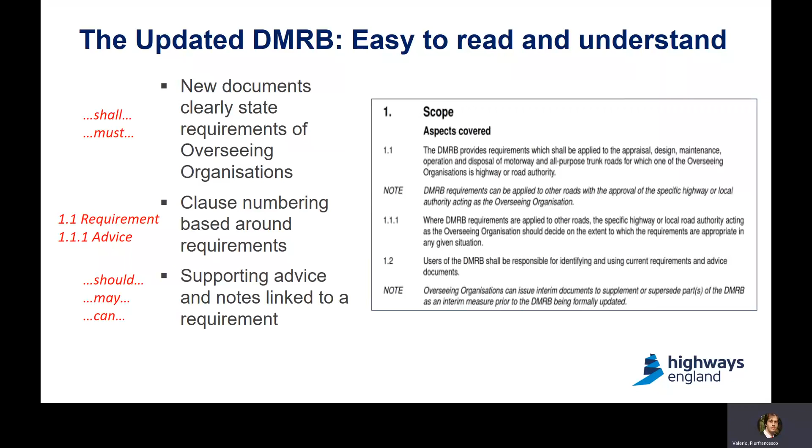Today we discuss the update to the standards for management of bridges with half joint and deck hinges. In the 60s and 70s, there were a lot of bridges constructed in the UK, and to standardize and simplify design and construction, many of those bridges were designed to include half joints or deck hinges. These are critical components with low robustness, as they are vulnerable to deterioration and they are difficult to inspect. They have been managed using BA39/93 and IAN53/04 for half joints and the BA93/09 for deck hinges.

Those documents have now been updated, leading to the CS466 and CS467. IAN53 contained the provision for management of half joints, while BA39 and parts of BD44 contain some provision for assessment. These have been merged, expanded, and have resulted in the CS466. BA93 contained provision for both management and assessment, and they have been updated, resulting in the CS467.

There are approximately 400 bridges with half joints and 100 bridges with deck hinges on the strategic road network managed by Highways England.

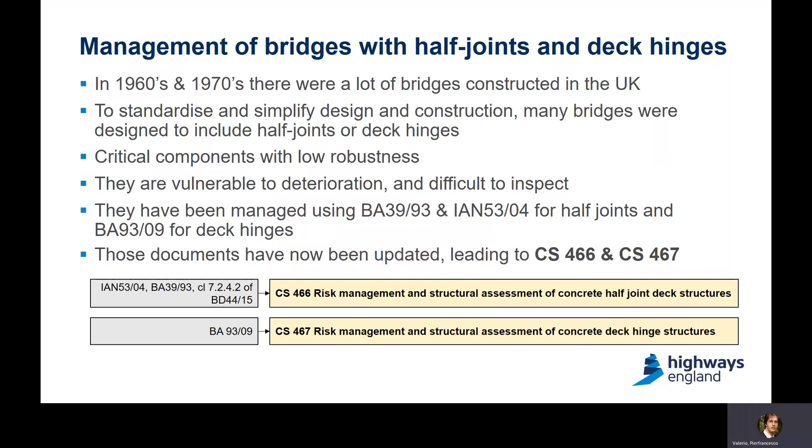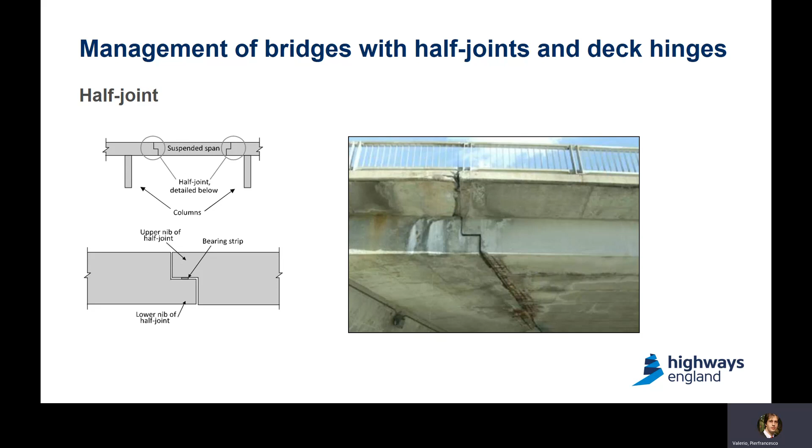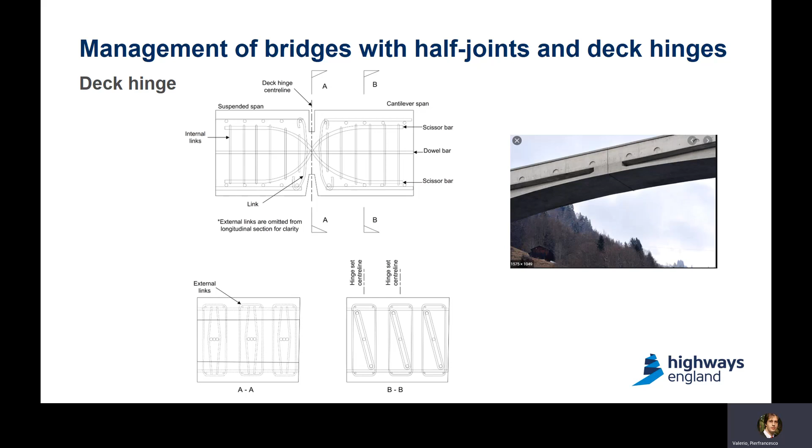In terms of risks and issues with this typology of bridges, access is difficult as they are often over live carriageways. Inspection and maintenance is difficult for this detailing because it often requires intrusive investigation. Defects are not often visible from the outside, making them vulnerable to waterproofing breakdown and water and de-icing salt ingress. Usually there's no alternative load path available, so they are susceptible to sudden collapse. The lack of robustness therefore requires careful management.

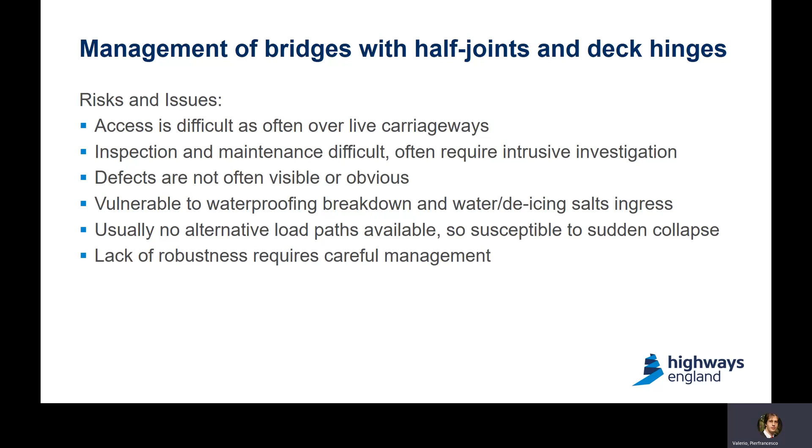Key changes in CS466 and CS467 compared with the previous documents include changes to the management process, and increased flexibility given to the choices that can be made by users of the documents in some aspects, including highlighting the importance of structure condition, and changes to the risk assessment process, the management plan, technical requirements, and guidance for structural assessment.

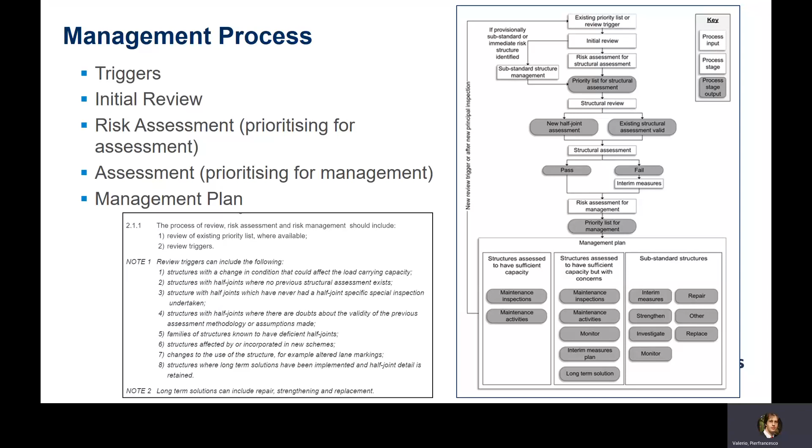For both documents, the management process is now clearly defined in a flow chart, as shown on the right-hand side of the slide. Triggers for initial review are defined, followed by a double layer of risk assessment that leads to either a new structural assessment for the bridge or directly to a management plan.

The new documents include a strategy for structures without signs of defects. The main documents give what is required to be done, but the how is achieved through guidance given in appendixes, giving flexibility to apply the advice in accordance to the circumstances.

Also, in terms of inspections, there is a pragmatic approach where more emphasis is given on the condition and the need to confirm this. A recommendation for undertaking inspection specifically targeted at the half joint or deck hinge element is given to aid with the risk assessment, which will need agreement and endorsement from the overseeing organization.

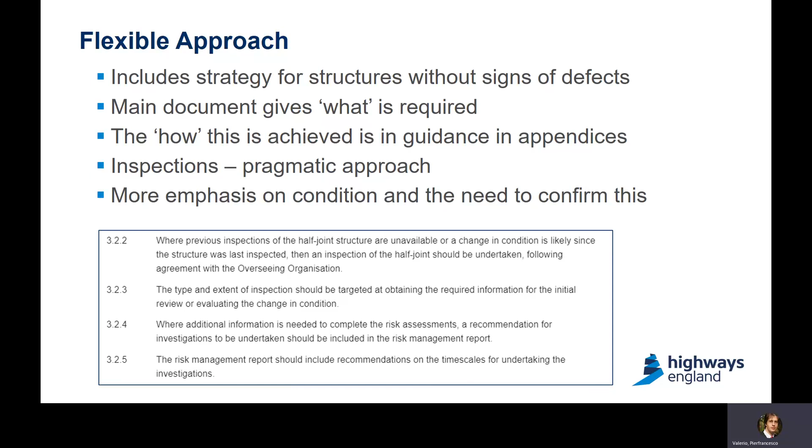In terms of the risk assessment process, as defined in the slides, it involves determining a primary risk rating based both on the detailing and the condition, and the load capacity when available. Half joints in particular can have detailing of the reinforcing bar within them that would not comply with modern design principles, and are therefore considered inherently more at risk.

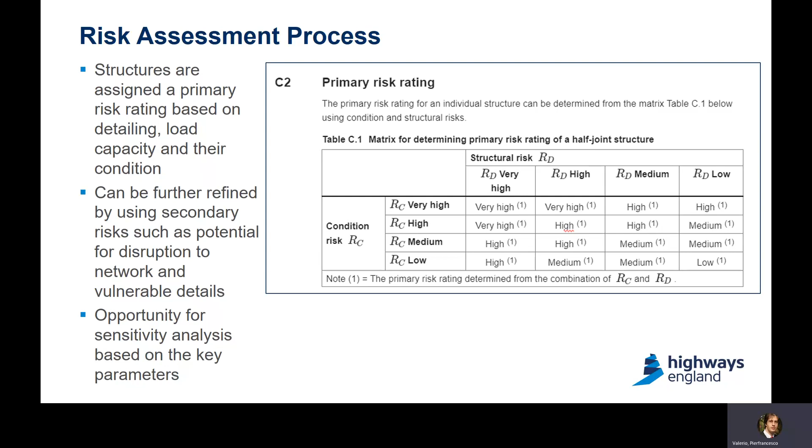The primary risk rating can be further refined by using secondary risks such as the potential for disruption and the presence of vulnerable details, and there is also opportunity for sensitivity analysis based on the key parameters given. This slide shows the main matrix for determining the primary risk rating of a half joint structure.

The document now clearly spells out what the contents of a management plan would look like for three categories of structures: those assessed to have sufficient capacity, those that are theoretically substandard, and the new category of those assessed as having sufficient capacity but with concerns.

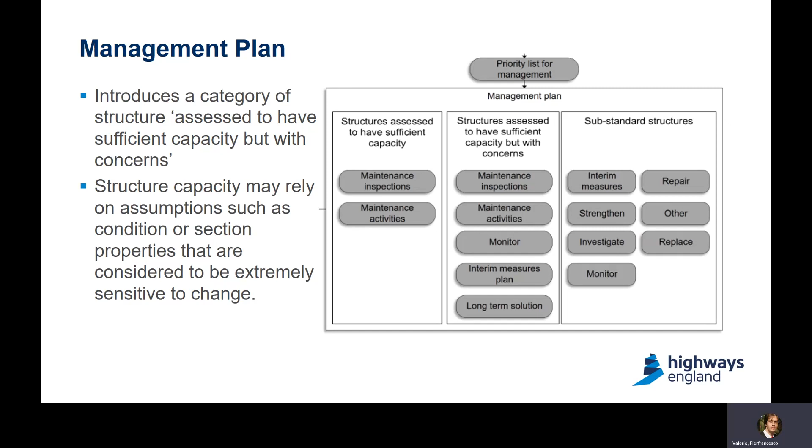The structure capacity may rely on assumptions such as condition or section properties that are considered extremely sensitive to change given the nature of this detailing. Therefore, the management plan for those three categories of structure following the risk assessment gives the potential measures that are considered appropriate for each type of outcome of the risk assessment.

In terms of structural assessment of the half joints and deck hinges, the new document highlights the importance of the detailing of the reinforcement in evaluating the risk to structural capacity. Detailing arrangement can be variable, but in both cases of half joint and deck hinges this can be critical to the structural capacity. One bar which is displaced or not present can dramatically change the ultimate load carrying capacity of the structure.

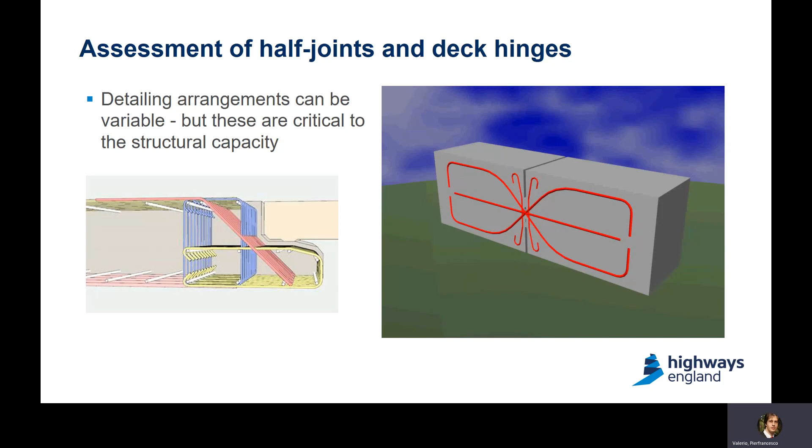Why were updates needed to the assessment part of the documents? In the CS466 for half joints, this is effectively a completely new document with extensive guidance on strut and tie models that were not covered previously. The previous content in BD 44/15 with regards to ULS assessment rules for half joints did not account for all the variety of potential detailing that can be encountered, and the lack of guidance often resulted in unrealistically low resistance and departure from standard methods of analysis and treatment of inadequate anchorage of rebars.

In terms of the deck hinges, the content is now presented using a strut and tie approach, which is aligned with CS466 and overall with the standard CS455 for assessment of concrete structures. The part of BA 93/09 dealing with assessment was written in a way that was a bit difficult to understand and could easily be misapplied due to the confusing way it was presented. Now the writing is much more consistent.

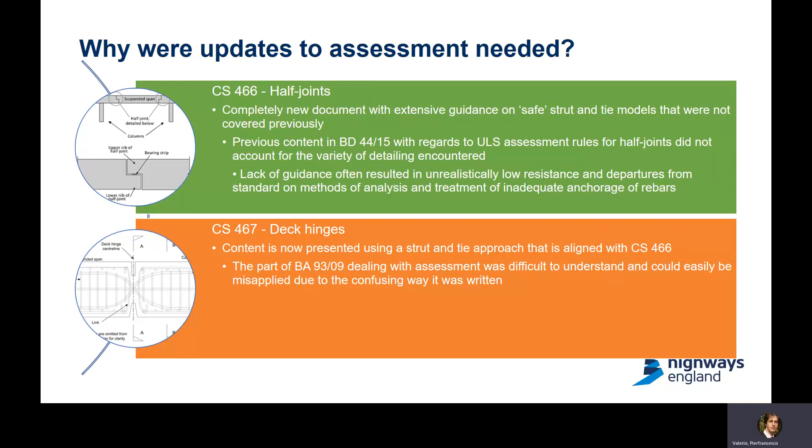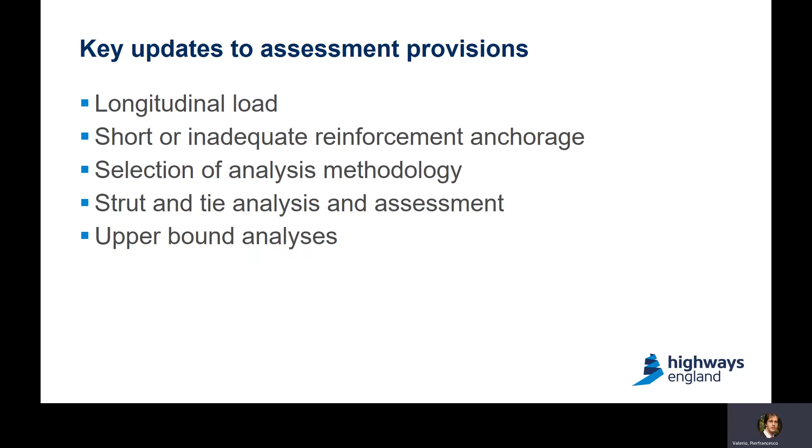In terms of the key updates to the assessment provisions, these are concerned with longitudinal loads and changes to requirements and advice on that, advice on short or inadequate reinforcement anchorage, the selection of analysis methodology, strut and tie analysis and assessment, and upper bound analysis. In particular, recommendations have been included with regards to taking into account the effects of longitudinal load onto the capacity of half joints and deck hinges.

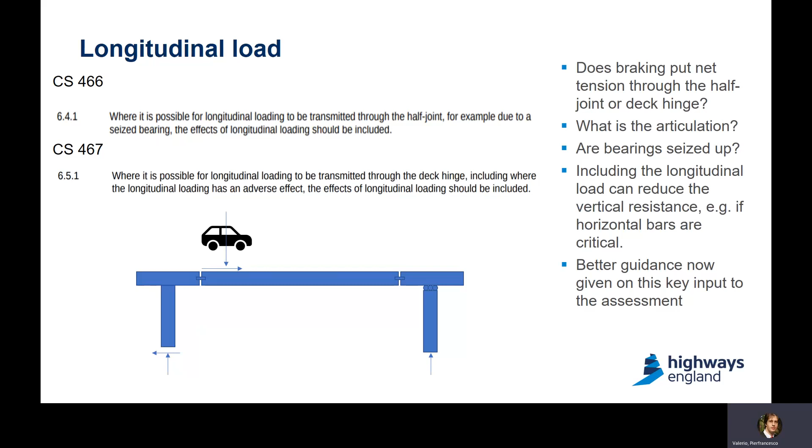Effectively, both documents now include explicitly taking into account these factors in terms of evaluating whether the braking put net tension through the half joint or deck hinges, in relation with the articulations and the condition of the bearings, and there is better guidance on this key input to the assessment generally.

In terms of short or inadequate reinforcement anchorage, recommendations are given that take into account, as appropriate, the effect short or inadequate anchorage of reinforcement - for example due to delaminated concrete reducing the bond of the rebars - can have on the structural capacity of the element. In the slides, it's shown that diagonal bars in the half joint, shown in green, may have very short anchorage lengths. Can they be included in the assessment calculation or not? What if the concrete cover is missing or there is corrosion? Guidance is given on all of these aspects.

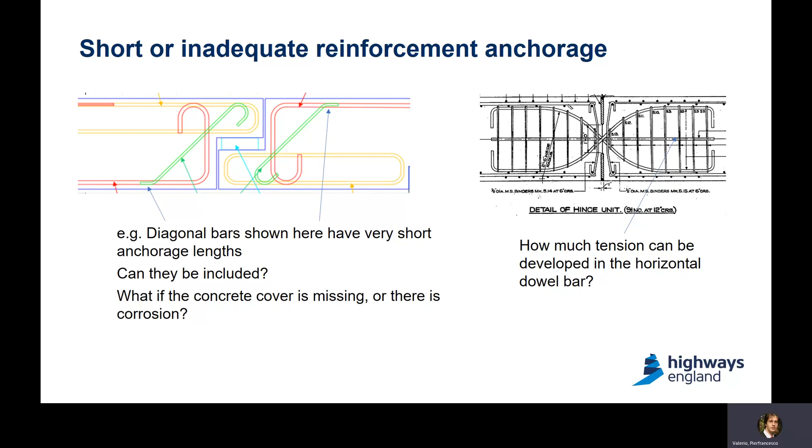Now, for the deck hinge, typically in the dowel bar, how much tension can actually be developed in the horizontal dowel bar - guidance is given on these aspects now.

The new content in CS455, the DMRB document for assessment of concrete highway bridges and structures, has a bond model for inadequate anchorage, which is referenced in these documents. For short or inadequate anchorage of reinforcement, effectively the new model permits, through a reduction factor K-COV, taking into account the reduction in bond capacity due to deterioration.

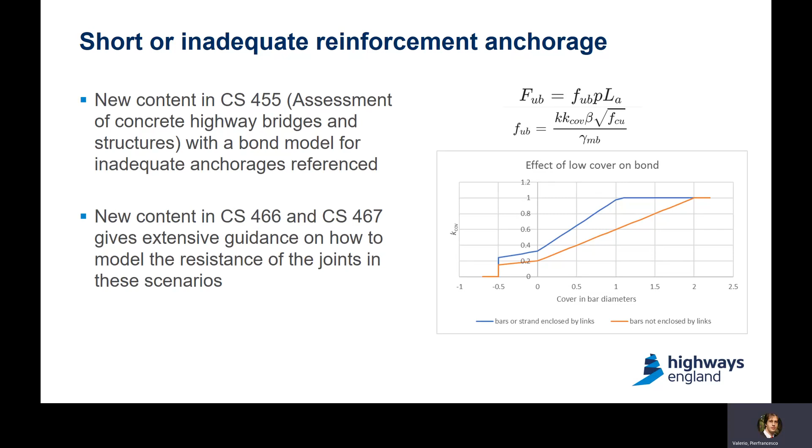New content in CS466 and CS467 gives extensive guidance on how to model the resistance of the joints in these scenarios.

In terms of selection of methodology of analysis for the structural assessment, there's been improvement and clarification with more guidance added. It is effectively, in both cases, a requirement to use a lower bound analysis like a strut and tie analysis. Lower bound analyses are on the safe side and can sometimes yield a low result, but when using the new guidance, refined strut and tie model arrangements, which are extensively discussed, can improve the resistance and give a more accurate assessment.

Upper bound mechanism analyses have an inherent risk of giving a potentially unsafe result if the critical mechanism is not identified. However, they are very useful to understand to which degree the lower bound analysis may have been conservative, and can be useful in checking whether further revision of the strut and tie model is worthwhile, or justifying a risk-based approach.

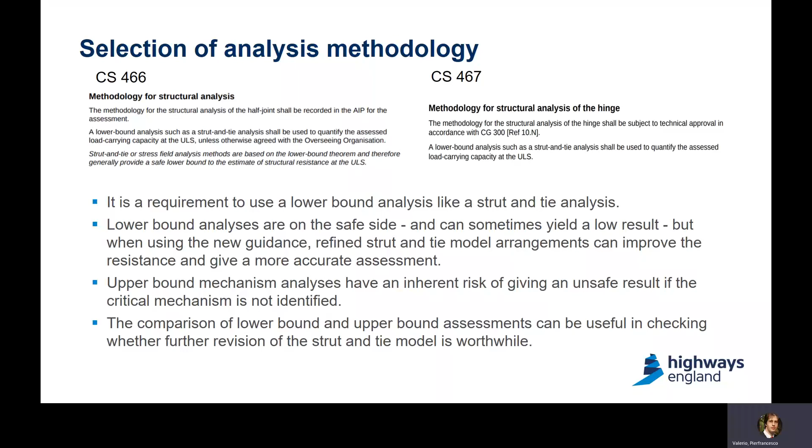The strut and tie analysis is now presented with extensive guidance given, including the use of refined strut and tie models.

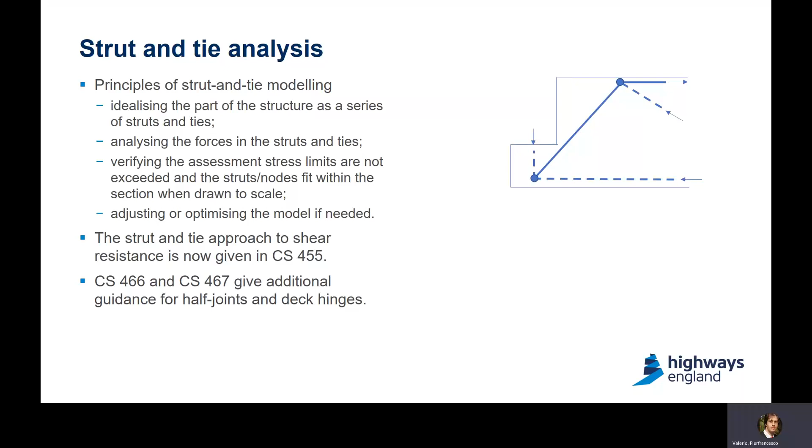Effectively, the principle of the strut and tie model is idealizing the part of the structure as a series of struts and ties, analyzing the forces in the struts and ties, then verifying the assessment stress limits are not exceeded and that the struts and nodes fit within the section when drawn to scale, and then adjusting or optimizing the model if required.

Strut and tie approach to shear resistance is given in CS455 and it's referenced in the document, but CS466 and CS467 give additional guidance for half joints and deck hinges on how to build and verify adequate strut and tie models.

The guidance given will be of much use for assessors in building up strut and tie models, compared to the previous versions of the document.

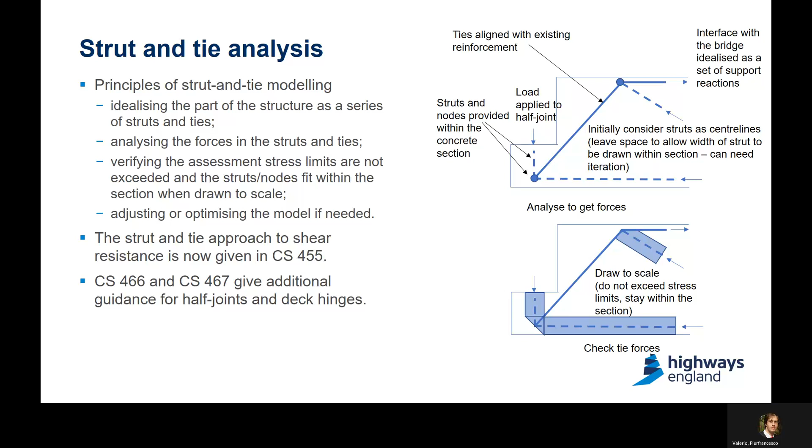In terms of half joints, guidance is now included on advanced strut and tie models where plastic redistribution of the force is assumed.

For the strut and tie analysis of half joints, where some reinforcement is expected to yield before the ultimate state is reached, and when this reinforcement has sufficient anchorage, the effects of plastic redistribution may be allowed to improve the assessed capacity.

The methods for modeling the effects of plastic redistribution in strut and tie analysis can include using statically indeterminate strut and tie models to control tie forces, using the superposition of complementary strut and tie systems, or using strut and tie models with wider struts, or struts that fan out radially, and larger nodes, in order to increase the number of reinforcement bars assumed to contribute simultaneously to a tie at yield.

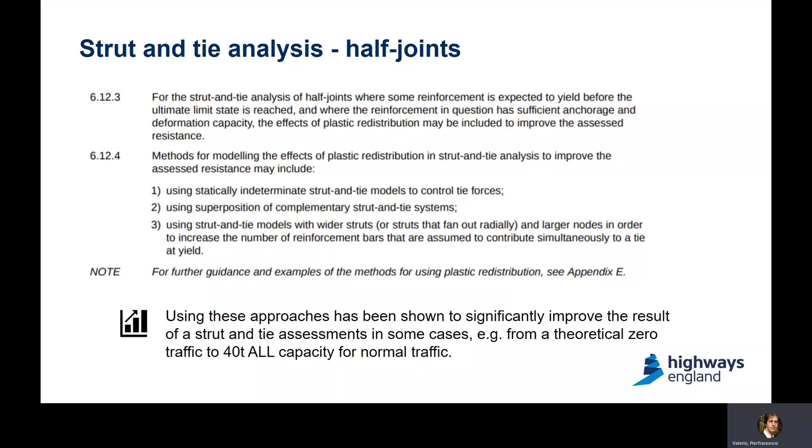Using this approach, it has been shown to significantly improve the result of strut and tie assessment in some cases, for example, even at the level of bringing the capacity from a theoretical zero traffic to 40 ton ALL.

In terms of half joints again, a new appendix to CS466, Appendix E, clarifies and gives worked examples on the methods for using plastic redistribution.

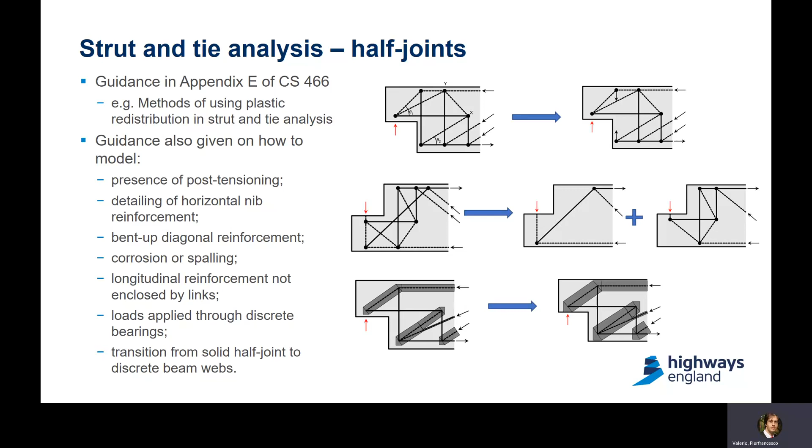Guidance is also given on how to model the presence of post-tensioning, detailing of horizontal nib reinforcement, bent up diagonal reinforcement, corrosion, spalling, longitudinal reinforcement not being enclosed by links, loads applied through discrete bearings, and transition from solid half joints to discrete beam webs.

As far as the deck hinges are concerned, the assessment process previously contained in BA93 has been rationalized and presented in the form of a strut and tie model in full compliance with the overall approach.

The slides show how the capacity of the deck hinge is first assessed by using a strut and tie model that does not rely on the dowel bar, with additional contribution then given from the concrete in compression and/or the dowel bar in tension.

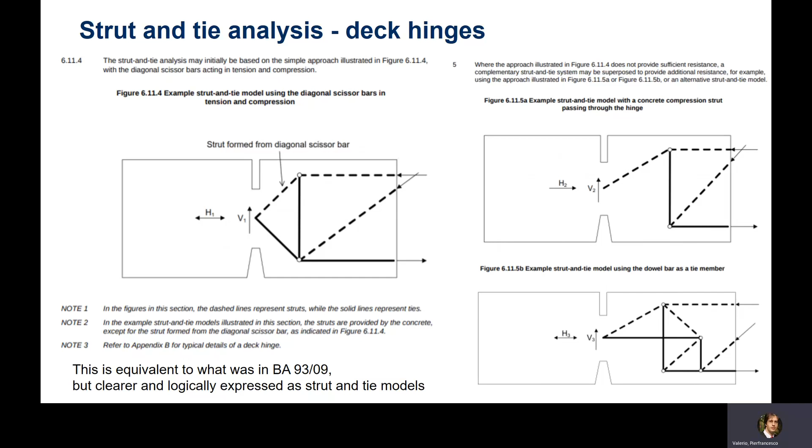The approach is effectively equivalent to what was the process in BA93, but it's more clear and logically expressed in the form of strut and tie models.

In terms of the assessment of deck hinges, there's guidance given now on how to allow for reduction in section of the hinge bar, including when fatigue analysis is performed.

For example, to take into account allowance for faulty construction with reduced hinge throat dimension in the model, and allowance for deterioration, corrosion of bars, and reduced hinge throat dimensions in the model.

A fatigue assessment is required for deck hinges, as experience has proven that fatigue of the hinge bars due to their localized bending may be critical.

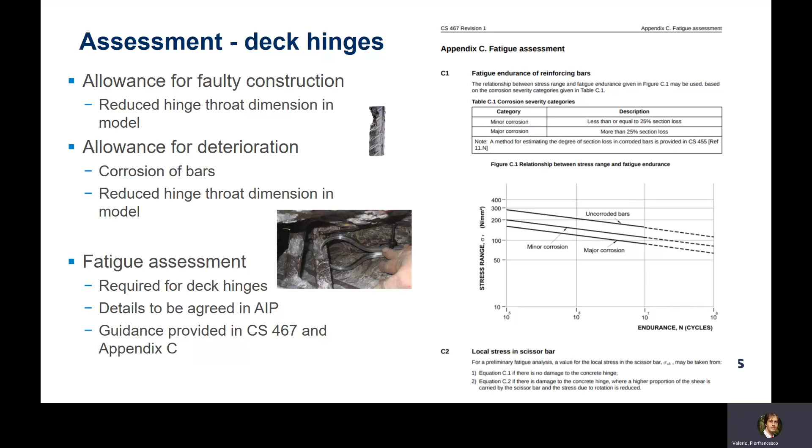Guidance is now given on a simplified method for fatigue assessment, with the specific details to be agreed at the level of the AIP, approval in principle.

In terms of upper bound analysis for half joints, CS466 now describes how to do upper bound mechanism analysis to supplement, not replace, strut and tie analysis.

This energy balance method has not been presented in the DMRB before, but it was conceptually the subject of a number of departures from standard. Its inclusion is based on new research on how to model the energy dissipation in concrete in shear-off situations.

CS466 also gives new advice on reduced bond strengths to account for splitting during the development of a failure mechanism.

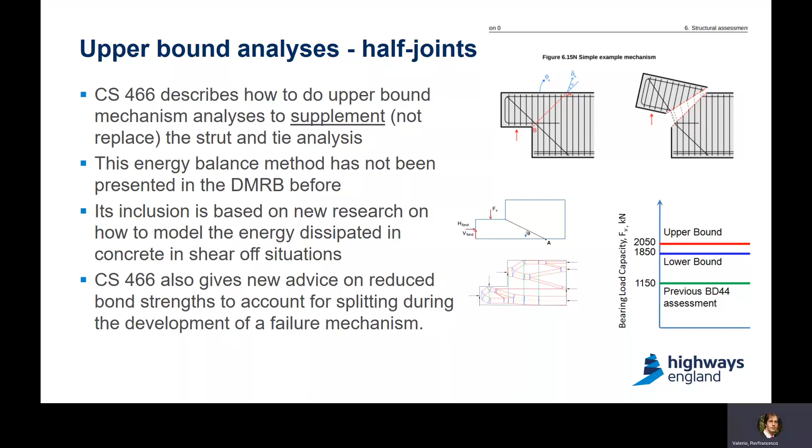To conclude, effectively in terms of impacts and benefits, the new documents contain a consistent approach with clearer requirements and updated guidance to proactively risk assess, prioritize, treat and manage vulnerable structures such as half joints and deck hinges.

They remove the need for departures from standard by incorporating requirements and guidance from previous departures and recent research. They improve safety by promoting more accurate assessments and more robust risk-based decisions, and lead to reduced cost due to less intervention and reduced network disruption through less conservative assessment.